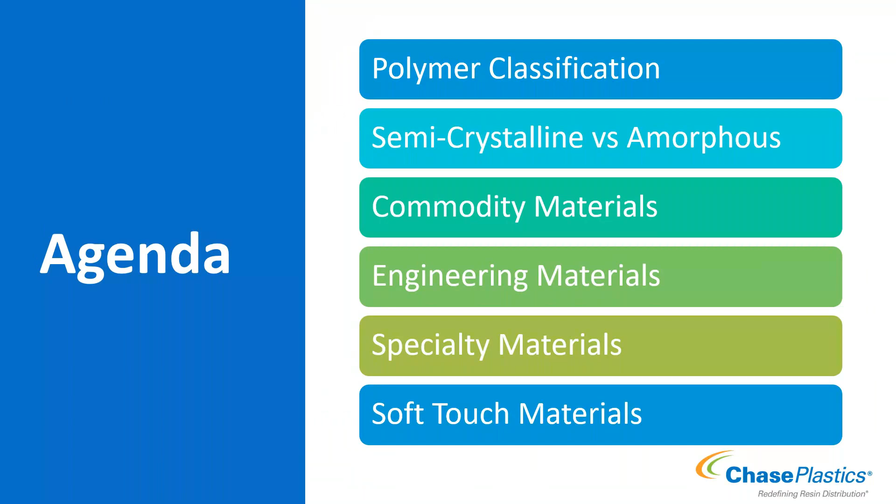Then we're going to go over different commodity materials, different engineering materials, different specialty materials, and then lastly, some soft touch materials. Okay, so again, if you were part of or watched the first part on basics, you'll recognize this pyramid here to go over the different materials.

So the different classifications, and how I also then broke up this presentation a little bit. You're going to have your commodity grades at the bottom of your pyramid. They're lower cost typically. You're going to see a little bit lower performance. Generally, thermally is the big one there. And then you're going to see that you typically buy them in really large quantities. So typically when you think plastics, these are going to be the materials that first come to mind, unless you're someone that does in fact just mold a bunch of specialty products. So we'll cover a few of those under the commodity section.

Then you have your engineering. So now you're going to go up in cost a little bit. You're going to go up in your performance a little bit. And generally you buy them in moderate quantities. There are some applications, of course, where you might buy a ton of the material, or you might only buy a little bit. But you're starting to see an improvement in some of your performance features here. So a little bit better heat performance. And then they might also have a special or unique value proposition within that material.

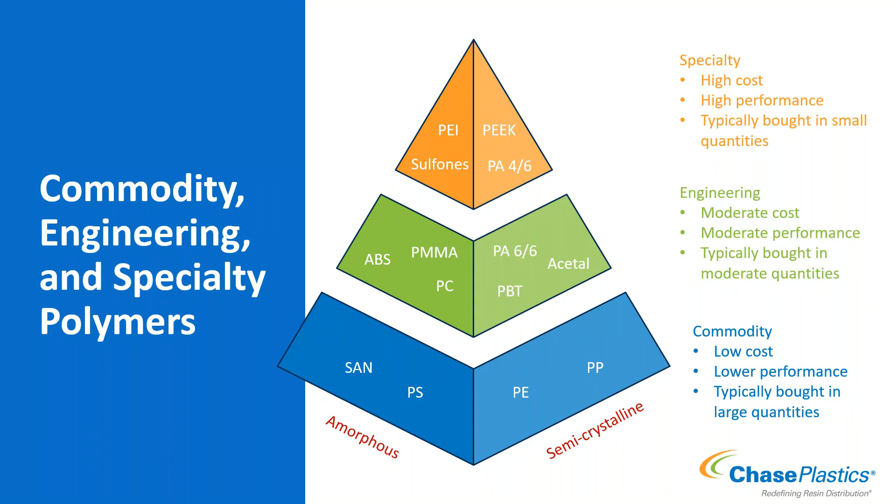And then specialty at last is going to be your higher cost materials. They have a special attribute or attributes that make them unique in how they perform. And so there's a couple of them we're going to go over today and talk about specifically. Higher performance, specifically in heat performance, and then again, also a unique value proposition that makes them apt for whatever they're being used in. And generally you buy them in smaller quantities. There's not always as high a demand in some of these specialty applications, so the material demand is also not as high.

Okay, so then again, if you were on the basics, you've seen this. We're going to do a semi-crystalline review quickly and an amorphous review quickly. Again, because I talk about the morphology of each material I cover, I want to make sure that we're understanding what that means about the material before we get too far into it.

So semi-crystalline materials have a highly ordered structure. They have crystal regions, and they are semi-crystalline because they're not 100% crystalline. A general rule of thumb is 30 to 70-ish percent. So 30% of it might be crystalline versus 70%, depending on which material we're looking at. They are typically opaque. There are some exceptions where we have made some of our semi-crystalline materials clear, but they are typically opaque because the crystal regions do not allow the light through.

They have a sharp melting point. So your Tm is where you're going to run a little bit hotter than that, because your Tm is the thermal point at which those crystal structures will start to break apart. There's enough thermal energy that they'll break apart so we can process them. They tend to shrink more. And so you'll see across the board, as I cover the materials, I also include a broad shrinkage range. It's typically going to be a wider range and a larger value for shrinkage for your semi-crystalline materials compared to your amorphous.

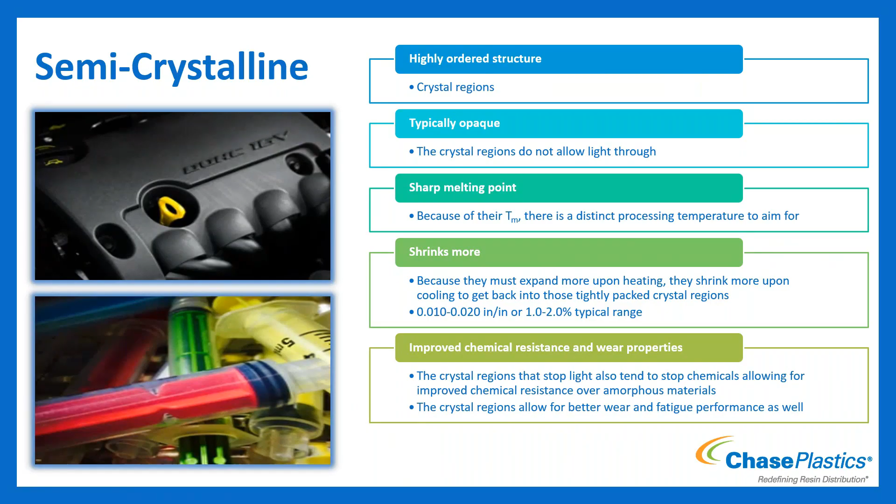Okay, and then they tend to have improved chemical resistance or wear performance. You'll see in some of the materials that I cover, that's going to be some of those value propositions, that they have good chemical resistance or good wear performance. You'll see that pretty commonly with our semi-crystalline materials.

Okay, and then amorphous, random structure. A means without, and morphous is structure. So without structure, it's got a random structure to it. They are typically transparent because they don't have those crystal regions to block the light from getting through. There are some exceptions to that, and we will talk about some of those when we get to the materials that I'm going to discuss today.

They have a gradual softening temperature. So because they don't have those crystal regions that require that temperature to break them apart, they separate and expand further out past your Tg. So they generally have a little bit of a wider processing window thermally than your semi-crystalline materials. They don't have to expand as much when they're being processed, so they therefore don't shrink as much either. And so a smaller range, generally in the 3 to 7 thou for your shrinkage there.

Again, I have the shrinkage values for materials we'll cover. With that, it does allow for better dimensional stability and tighter tolerance control out of your amorphous materials. So you'll see in a couple of the materials we talk about that will be brought up as a value proposition for it. And then also because it has less likelihood to shrink or shrink non-uniformly, you're less likely to experience warp out of your amorphous materials as well.

Okay. All right, so that is covering our general overview and reviewing what we had. Before I get into each of the individual materials under those sections, a couple things I want to point out. One is going to be the generic values that are provided here are just that. They're generic and generally a really good range or point to start with in terms of the performance of the material. I would always advise, if you know you're going to use a very specific grade of this material, use that data sheet, use that value, use that information provided by the manufacturer. So again, keep that in mind.

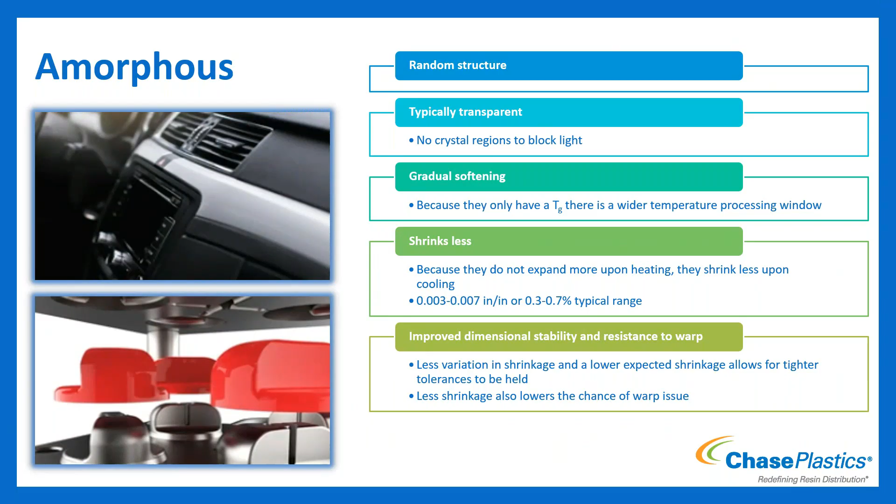Okay. All right, so we're going to start with commodities. I cover a few of the commodities. I'm not covering all of them that are on the pyramid. So if there's a certain commodity you have questions about or would like to know about, same with the engineering materials and the specialty materials. I could talk for hours on end, and I'm not trying to take up all of your time doing that. So if there's any material really that's not covered and you want to talk about it, feel free, get with me and we can talk about it. But the ones that I do cover, we're going to start with polypropylene.

So morphology, it is a semi-crystalline material. So we covered that, means you're going to have a little bit more shrinkage. So the shrink for your polypropylene is in the 1.7 to 2.2 range, or 17 to 22 thou range. Your specific gravity, generally unfilled, is going to be about 0.9 to 0.91. Because it is lower than 1, which we compare it to water, these materials will float. So if you've ever worked with a polypropylene part or pellets, if they're unfilled, pellets will float or parts made of it will float.

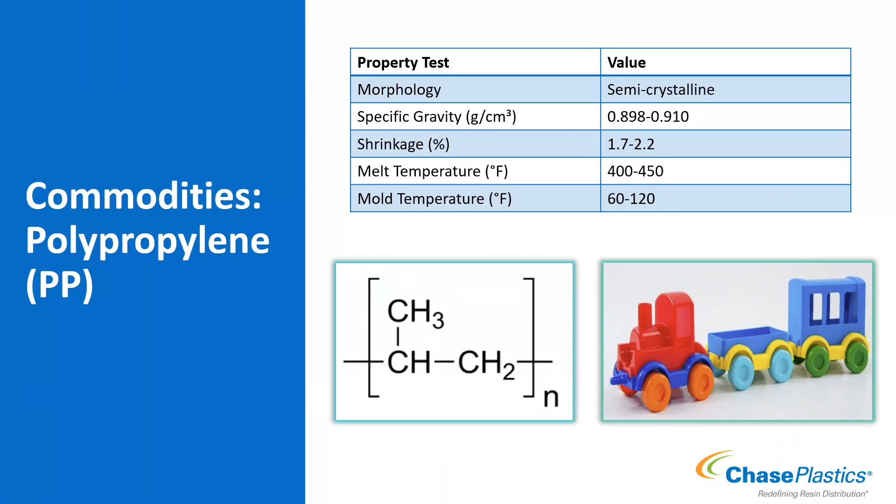Okay, so some information about polypropylene. Impact values. So when we're talking polypropylene, you're going to have a lot of different variants of it that are going to vary in impact performance. And so what we do is we can take polypropylene and we can copolymerize it with ethylene monomer, and we can get propylene copolymers.

Depending on how much we use and how we do it, we can affect the impact of the material. So propylene as a homopolymer can start with an impact as low as under 1 foot-pound per inch notched Izod and get all the way up to no break or plus 10. So we can really vary its performance and impact depending on how much ethylene is in the material and how that's processed. So you can start your homopolymers with low impact, and then the common ones are going to be a 2 Izod. Though there is a range, you can get a 1.5, you can get a 3.5.

2 Izod is a very common impact for a copolymer, and then your no breaks, again, which are generally anywhere from an 8 to a 10. It kind of depends on the supplier and what they will denote as a no break, but really high impact out of your copolymers there.

You can also make polypropylene transparent. So random copolymers can also be transparent. I do note though that there is a little bit of haze with your propylene. So depending on the thickness and how it's processed and a few other things, you can affect the haze or cloudiness of it, but you can make a clear propylene. Propylene being semi-crystalline, the clear versions are those that don't follow the rule, that have to be opaque.

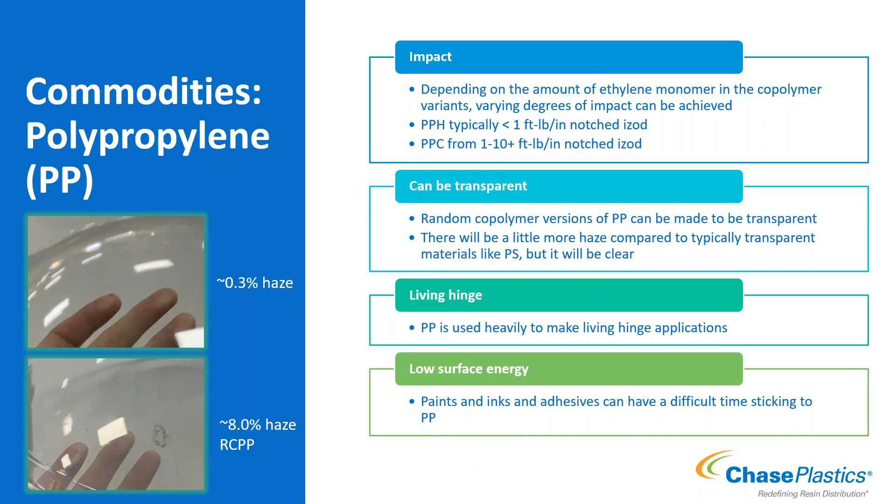So some applications for propylene, stuff like bottles. So shampoo bottles could be made out of propylene. The syringe bodies that are clear typically are made out of a clarified propylene. Dog bowls, different trim inside of automotive interiors, a lot of different applications in propylene and across varying types as well.

All right, so propylene, now we'll talk about ethylene. So you'll notice the chemistry on that. It does not have the additional CH3 off the backbone. And so kind of similar in chemistry, just doesn't have that pendant group CH3 hanging off. And so polyethylene morphology is also semicrystalline, just like your propylene is. A specific gravity range of 0.915 to 0.965. You'll see when we talk about the different densities, high density, low, linear low on the next slide. That is the reason for your large range in specific gravities.

Being semicrystalline, it does also shrink quite a bit. So you're in the 1.5 to 2.5 range. Your temperatures, it's still in that 400-ish range, and your mold temperatures in your 70s to 150s.

Okay, so some additional information on it. So polyethylenes come in a variety of densities. So you might hear or use high density polyethylene, low density polyethylene, or linear low density polyethylene. That is 100% attributed to if the material is branched or not. So for your high density polyethylenes, there is no branching that occurs. And so that additional monomer is not growing basically off the side and branching out.

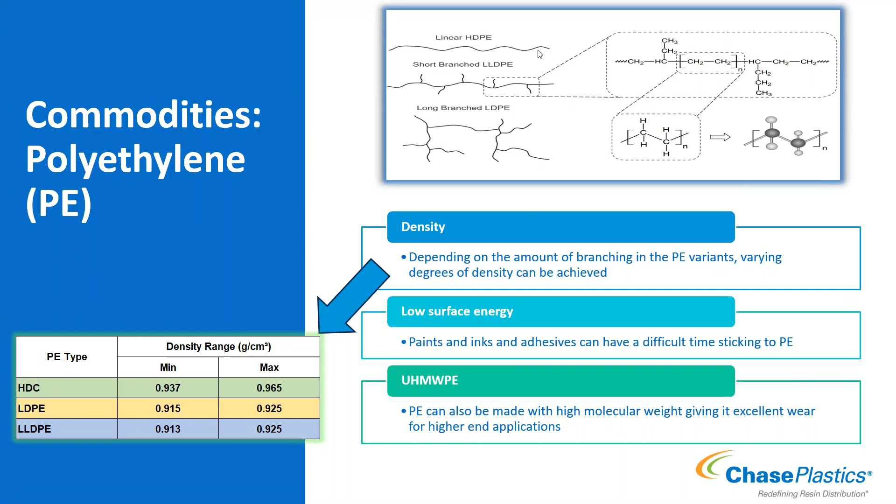So some of those applications, the ultra high molecular weight polyethylene with that great wear performance and durability is used for iceless rink tiles. So if you've ever gone ice skating, quote unquote ice skating, where they utilize plastic tiles instead of actual ice, that is ultra high molecular weight polyethylene.

And then some other applications for more standard polyethylene grades would be stuff like your recycling bins, your milk cartons are made out of high density, some of your chemical containers or gas containers even will be made out of polyethylene. So common material there as well within a lot of different applications.

Okay. And then our last commodity that we're going to talk about today is polystyrene. Again, there are other commodities, of course. If you have questions about them, feel free to ask, but these will be the three we're going to cover.

So now if you look at the chemistry, similar to your ethylene and propylene, but instead of the CH3 that the propylene monomer has, it has a benzene ring off the backbone. That benzene ring gets in the way when it has a random structure in terms of how it alternates on the backbone. And so polystyrene in general is amorphous. We'll talk about a variant of it on the next slide, but standard polystyrene is an amorphous resin.

It is very clear. It has a specific gravity of 1.04. So now we're above 1. So these are no longer materials that will float when they are put into water. They are now higher specific gravity materials. If you were to take any of those knives, forks, what have you, and put them in the water, they're going to sink.

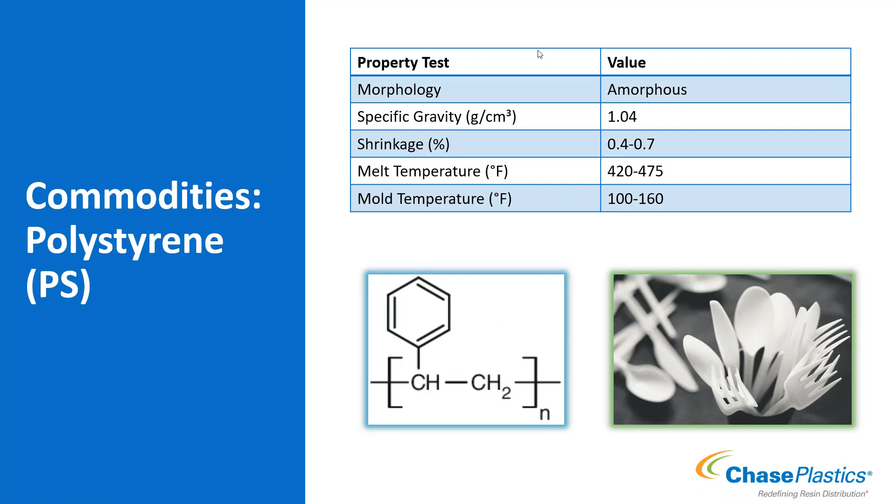So some additional information on polystyrene. Polystyrene has excellent clarity. It is also a very brittle product. Polystyrene is also known as general purpose polystyrene. So if you see GPPS, or sometimes people will use the term crystal styrene, they are all referring to standard polystyrene material. Okay, so it's very brittle, but very clear.

But what we can do then is we can add stuff to it to improve that brittleness or that impact performance. So high impact polystyrene, HIPS, we will take a rubber or impact modifier and we add it to the polystyrene. It improves its impact. Because of the rubber though, it does affect the clarity. So standard GPPS is clear, very good clarity. As soon as you add something to it, like the rubber for HIPS, no longer a clear product. So you do lose that.

And then a couple specialty versions of polystyrene. Polystyrene can be made to alternate the benzene ring in what they call a syndiotactic pattern. So it alternates back and forth which way it is. So if you follow the arrow, it shows alternating on each side.

So if you've heard of SPS, or syndiotactic polystyrene, those alternating benzene rings allow the chains to get close to one another because they're in such a pattern that now they can kind of get close to one another. And so syndiotactic polystyrene actually will crystallize and is a crystalline version of standard polystyrene. And so it gives a little bit better heat performance, a couple other performance boosts there as well. But heat performance is a big one, and it's used a lot more in more electrical type applications.

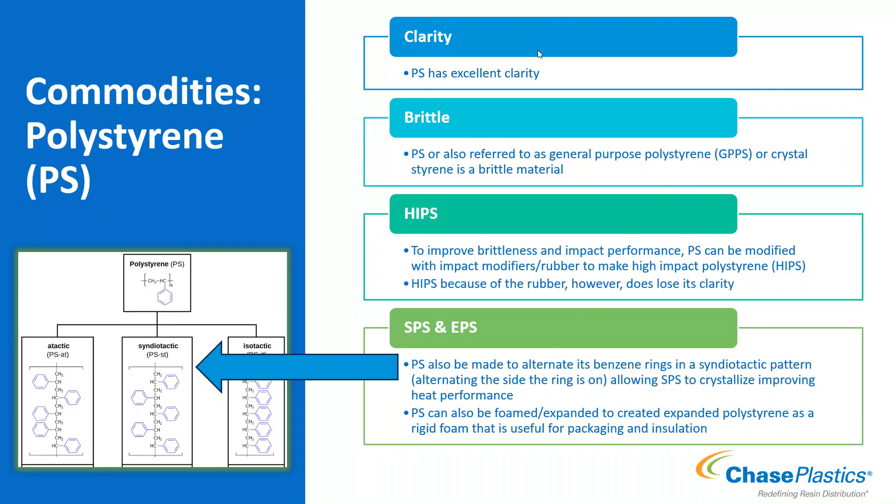Okay, if we recall, the younger generation, I'm sure they don't have CD cases, but CD cases, you think of them, they drop, you step on them, they break, they're brittle. Polystyrene material was typically used for those. Your cutlery that's really fairly easy to break. You go to eat something, use the fork into whatever you're trying to eat, you push a little too hard and it snaps a little piece of the tine off. It's probably a polystyrene piece of cutlery.

And then your foamed materials. So egg cartons are made with EPS, and some of your insulation or some of the packaging for holding things in place when it ships, stuff like that, also EPS. So different variants of polystyrene and different versions of using it.

Okay. All right, then we have some of our engineering products now. So we had our commodities, we did propylene, ethylene, and styrene. Now we're going to talk about some of our engineering products. So now we're moving up a little bit in performance. We're getting a little more complicated. As you can see, the chemistry is a little more complicated than the last three we've had, but a little bit of improvement in certain areas in terms of performance.

So ABS is acrylonitrile butadiene styrene. Across the chemistry, that's what you see here. In this section is your acrylonitrile, your butadiene, and your styrene. So you'll notice the styrene, if we remember our chemistry and that these little joints here represent a carbon, is actually the same monomer and chemistry of your standard polystyrene. So ABS is made up with styrene being one part of the polymer.

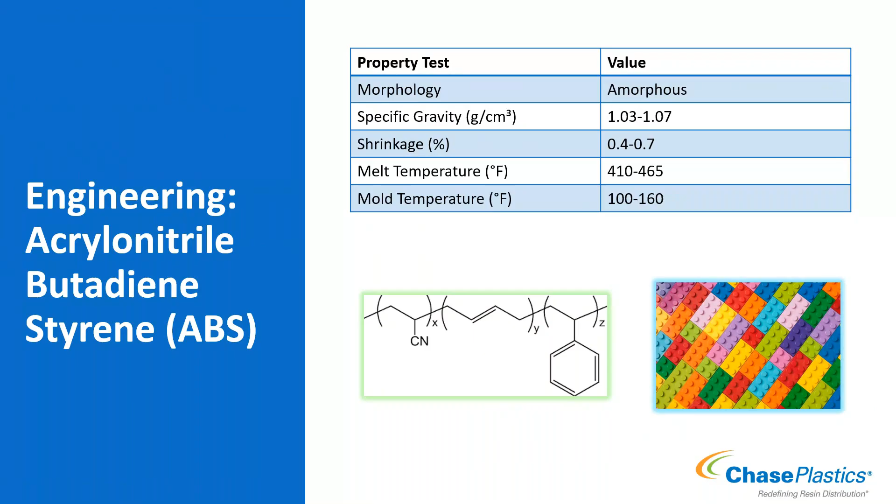Okay. All right, so as you'll notice, as we get into more complex, more engineered products, there's likely to be a little more information on them because there's a little bit more to know about them. So ABS is what we call a terpolymer, ter being three. So it's got three components, A, B, S. And so as a terpolymer, the A, acrylonitrile, helps with its heat performance. There are some other smaller things it also will help with, but the overall driving change when you increase the acrylonitrile amount is going to be the heat performance. Your butadiene, which is a rubber, is good for impact. The styrene portion helps with the processability of the material.

So what we can do is change the ratio of how much of each of those components is in the ABS grade, and that's what allows us to get varying performance out of ABS. So if you look at some data sheets on a standard general purpose ABS, maybe you're looking at an impact value of 4, 5, 6 foot-pounds per inch Izod. Then you have grades that are considered high impact grades that get you into the 8 or 9 foot-pounds per inch notched Izod performance. And then you have grades that are standard ABS, and then you have high heat ABS grades.

So again, I can change out the ratio of how much of each is in it, and that's what gives me my varying performance. Okay. The butadiene rubber in the ABS is what accounts for ABS being an opaque resin. As we mentioned when we reviewed, a lot of amorphous materials tend to be transparent. ABS is not transparent because of the butadiene. It does not allow the light through.

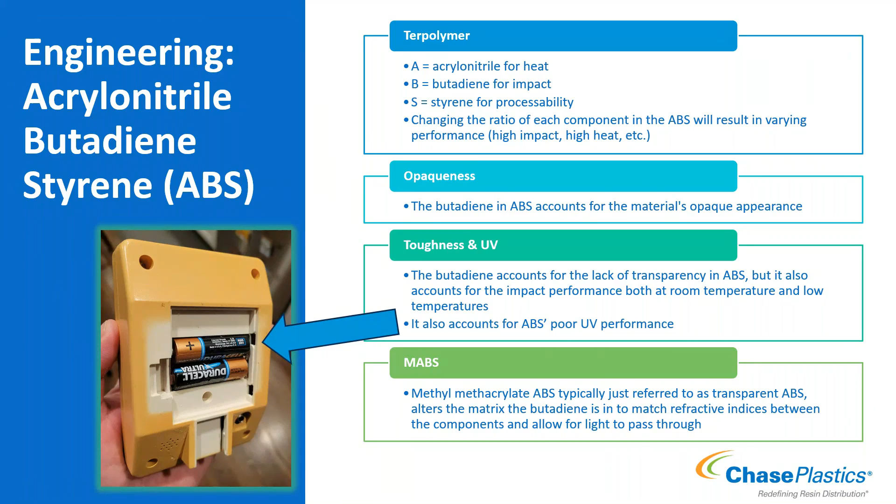So the matrix the butadiene is in changes its refractive index, and now the two match. And so it allows light through. So really complicated way to just say, we can make ABS transparent. We just alter the matrix the butadiene is in. So there are transparent grades of ABS.

Okay, so some applications, think housings, think things that have to have good dimensional stability. So maybe components on hospital beds, maybe housings on medical machines. The little window on your soap dispenser, a lot of times they use MABS for that, transparent ABS. Maybe the push handle itself is ABS, and then the lens itself is MABS, transparent ABS.

ABS is used a lot in pipes and fittings. And then it's also used a lot for automotive. If you've got little trim parts or decorative parts, specifically your really shiny parts, a lot of times they tend to be ABS, or other parts within a car can be made out of ABS. And then the big one that we always like to point out is Legos are made out of ABS. And so good dimensional stability, we need to be able to put the parts together, right?

Okay. All right, so ABS, now we're talking about polycarbonate. So moving on our list of engineering products. So polycarbonate is also an amorphous material, but it is clear. So amorphous grade that is clear. You'll see the specific gravity of this material jumps quite a bit. So we had been in the 1 to less than 1 range. Polycarbonate jumps up to 1.2. Shrinkage is still in that low range, so 0.5 to 0.7 for polycarbonate, amorphous material again.

Now our temperatures are starting to creep up. We're in the 500 to almost 600 degrees, so a little bit hotter of a material. And then mold temperatures in the 150 to 250. Again, a wide range because I'm trying to cover generically where some of the other polycarbonates may fall. And what I want to point out is our 2 benzene rings here in this chemistry with your CH3 groups. This is the remnants of bisphenol A. So we will talk about it in the next slide, but if you can, keep in mind what this looks like.

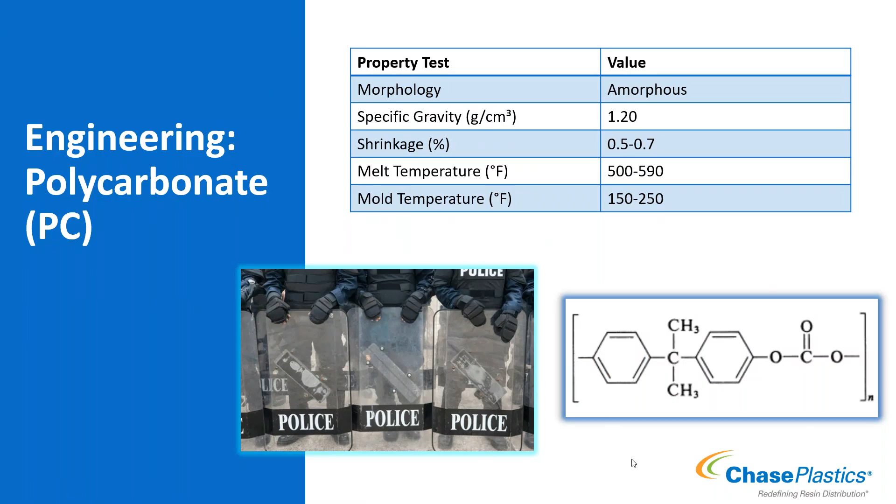There is another material that contains it as well that will be pointed out when we get to it. Okay, so again, as we're getting a little more specialized, there's a few extra words on these materials because they do a few different extra special things. And so I want to point them out.

So polycarbonate, excellent toughness, great impact performance when we talk about unmodified materials. So 10 plus foot-pounds per inch IZOD out of a standard polycarbonate, as long as we're not getting too small of a radius or too thick of a part, which we'll talk about in a little bit, but excellent toughness out of polycarbonate. Polycarbonate can also be formulated to utilize a UV stabilizer and maintain clarity.

So a lot of times when you start adding stuff to clear materials, you start losing the clarity because you have something else that's competing with allowing the light through. So polycarbonate can be formulated with UV stabilizers and then maintain its clarity.

BPA should be talked about because it is a part of polycarbonate and we get asked about it. BPA is part of the chemistry. So we react phosgene and bisphenol A to make polycarbonate. So if you have an end user or you are an end user and you want to be able to market that the material has no BPA, you're not able to do that with polycarbonate. Polycarbonate is made with BPA.

It is there. The one thing though I do want to point out is that based on safe harbor levels, or levels that have been established by EPA or also the EFSA, which is the European safety standard, they have set a safe level at 0.05 milligrams per kilogram of body weight. Which means nothing if you don't know the exposure of the material that you're seeing.

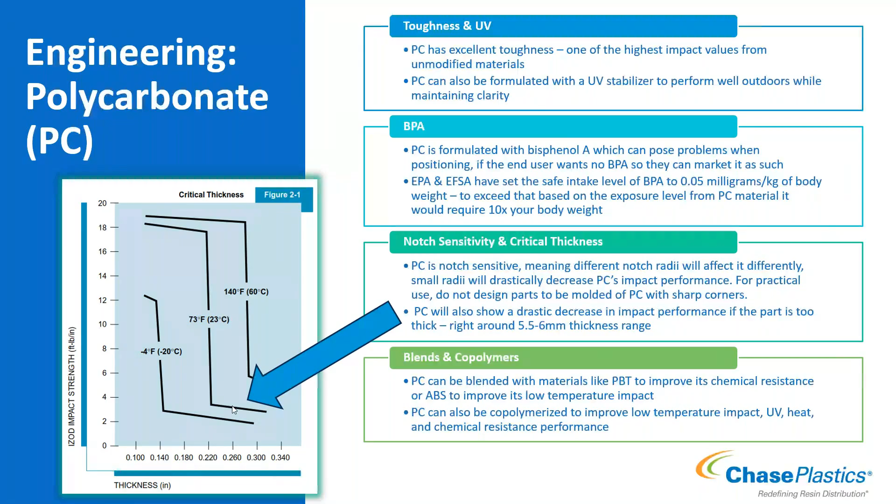Okay, and some applications for polycarbonate, again, great impact. So stuff like your automotive lenses, if you've got rocks that are coming up and hitting, the polycarbonate can withstand that impact. They tend to be coated generally to help with scratch resistance also. That's a little side note on that, but because of being able to withstand the impact of rocks or other things that might come up from the road, lenses are typically polycarbonate.

A lot of meter housings and stuff where we want to maybe not allow someone to crack it and break it open and get to whatever's behind it, but then still be able to see through it, maybe even protect it from UV if it's a UV stable grade and make sure that the UV light doesn't get through it to what's behind it.

Safety glasses are commonly made out of polycarbonate. And then those really large water jugs generally are also made out of polycarbonate. If you were to use a material that was a little more brittle and you dropped one of those things that are full with lots of water, very heavy, likely to crack and break, and we can't have that happening. So a lot of good options to utilize the really good performance in toughness that polycarbonate has.

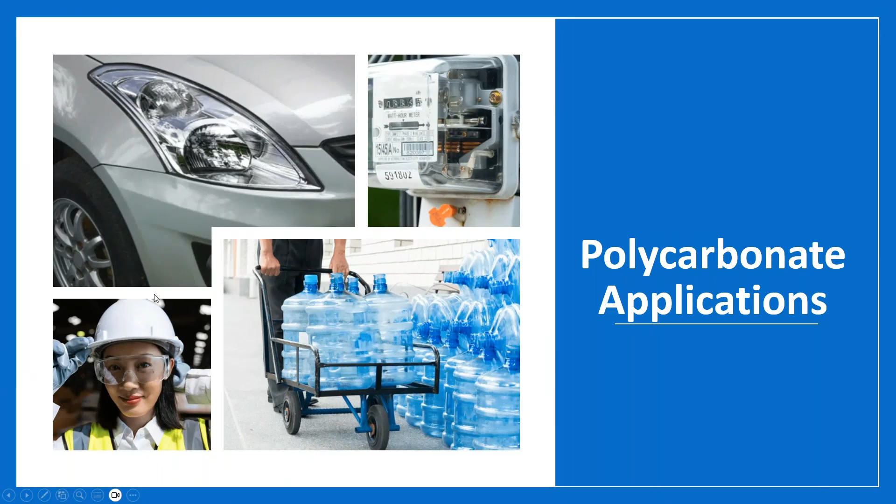Okay. All right. Now, nylon, as I mentioned again, there is a separate presentation just going over a bunch of different types of nylon. And so in this case, I kind of did more of a covering of the family of polyamide versus each individual material a bunch of times. So I gave a general performance review and then the ranges that kind of go across the majority of those nylons as well. So the morphology of nylon is going to be semi-crystalline.

You can make amorphous nylon. So they do have amorphous nylons that are clear, or microcrystalline nylons that are also then clear. So that goes against the standard semi-crystalline materials that are opaque. But our standard nylons that we'll be talking about, they're semi-crystalline.

Specific gravity ranges from 1.01 in your long chain grades up to 1.18 in your short chain grades, so more like a 4,6. And then your shrinkage also has a varying range because we're talking a bunch of different materials at once. So 0.6 to 2.2, depending on which nylon material type we're talking about.

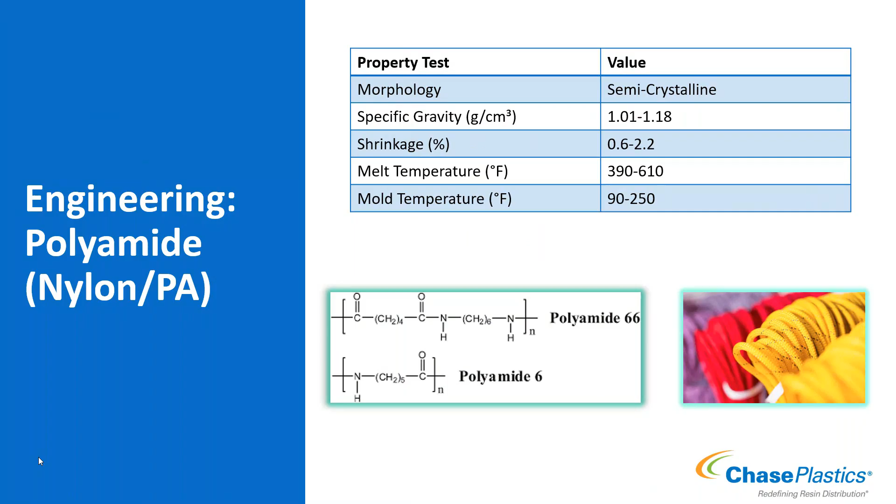All right, so some information about nylon in general. The standard nylons that we're talking about right now are considered linear. So there's no benzene rings, there's no aromatic content to it. They're just what we call standard linear grades. And so your 6, 6,12, 10, you name the number, as long as it's just a number, is going to be a linear nylon.

There are specialty grades of nylon that I am not covering in this presentation, but there are specialty nylon materials like PPA or PARA that are going to have aromatic content. So they're going to have benzene rings in their chemistry.

Those are specialized. Again, not talking about them here, but if you have questions about them, feel free to let us know. Your 4,6, 6, and 6,6 materials are going to be your standard nylons that are considered short chain nylons, or we just call them nylons. And then long chain polyamides, LCPA, if you've seen that acronym, that would refer to your nylons like your 10s, your 12s, your 9s even that are kind of odd. But those longer chain, higher number nylons, those are within the long chain polyamide portion of the family.

Okay. So nylon, though, in general, has great chemical resistance, specifically to automotive oils and greases. So great for automotive applications because it has really good chemical resistance to a lot of the chemicals it might come in contact with in an automotive application. Nylon also has really great wear performance.

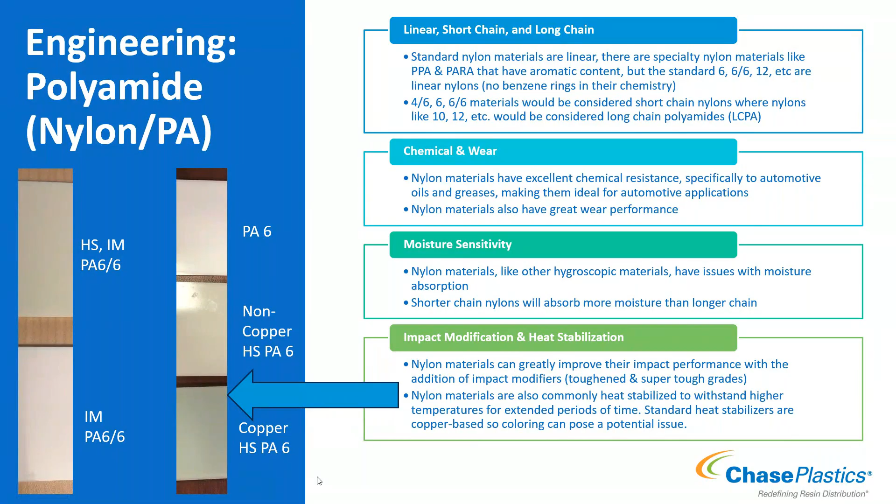Some applications, very wide range of applications because we have a broad range of nylons that we were talking about. Again, tried to shorten it down as best I could, but stuff like your under the hood applications, radiator end tanks, stuff like that under the hood are going to be nylon materials typically. Zip ties are generally going to be nylon based. Modular belting, so again, I mentioned resin on resin wear, much better with nylon than acetal. So a lot of plastic modular belting could be a nylon of some sort.

Okay. All right, and then I believe the last engineering product we're going to cover is polyesters, so PET and PBTs. And so we'll cover them kind of as a two-part family, if you will. Both of them tend to be semicrystalline, though there is an amorphous version of PET we'll talk about briefly, specific gravity between 1.3 to 1.4, depending on if it's a PET or PBT. Your shrinkage is between 1 and 2%, but they are semicrystalline, so you do see a larger value for shrinkage. And then your temperatures are in the 500-ish range, and your mold temperatures are in the 100 to 200-ish range.

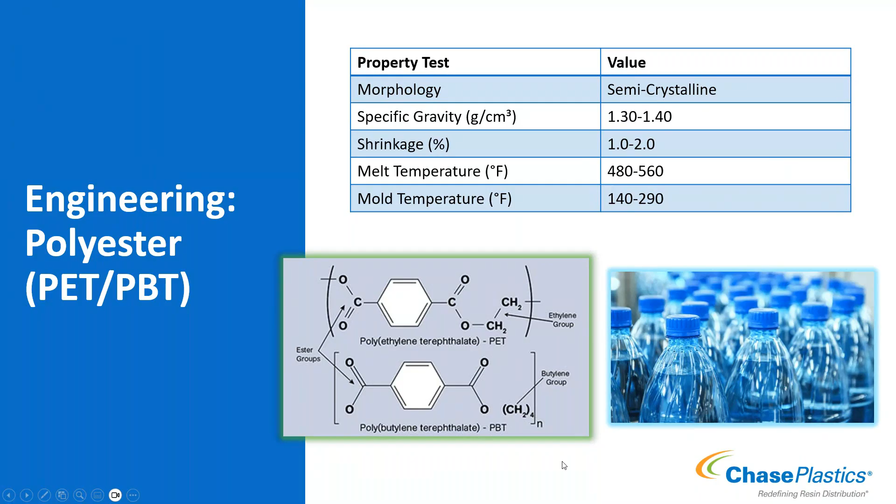Okay. But PBT, because of those additional CH2 groups, it's more mobile. It moves a little easier. It crystallizes easier and faster. Generally speaking, if you're going to do injection molding PET grades, they're generally either filled or have some nucleating agent or some type of filler to help aid in the crystallization, because it does not want to crystallize very quickly when you're using a PET.

Then you have amorphous PET grades. Sometimes they'll be referred to as bottle grade PETs. These are ones where, when we process it, we're going to freeze it quickly so it doesn't allow it to crystallize. So you effectively make an amorphous version of it, and that's what you're going to get out of your bottle type PET grades.

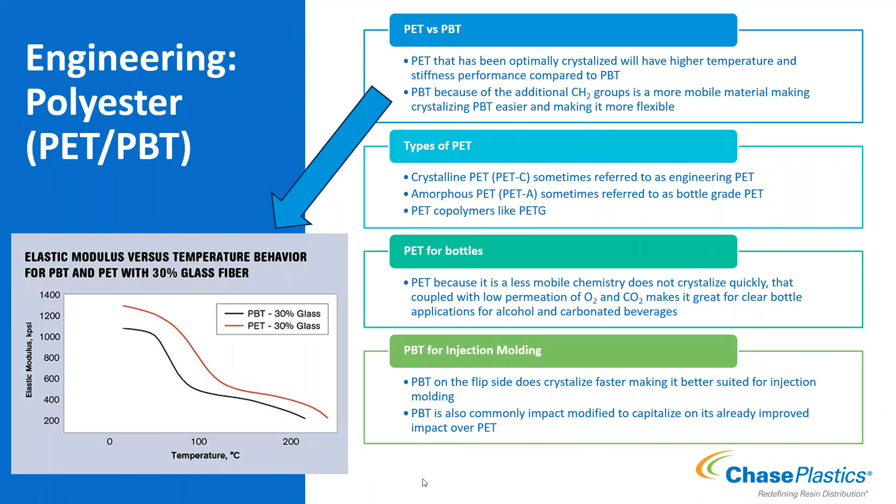Okay, so some common applications for these materials. Your keyboard housings are going to be PBT, your bottles PET, blister packaging for, you name it, medical, toys, whatever it may be. A lot of times we'll utilize PET. And then connectors, different electrical applications, are going to utilize PBT pretty commonly.

Okay. All right, so now we're going to get into the specialty products. You'll notice there's a lot of interesting value propositions about them. LCP I'm going to speak about briefly. This is the only slide I have on it because these aren't materials that you are necessarily running into in large quantities, or applications that require these types of materials. So I'll go over them, but the majority of the time we're not seeing these types of materials out there. But it is good to know about them and kind of know how they perform.

So LCP, liquid crystal polymer or liquid crystalline polymer, I've heard it both ways. Its morphology is neither semicrystalline nor amorphous. Semicrystalline materials, when they are processed and in the molten state, do not have any crystallinity left to them. They're all amorphous when molten. That's why when it shrinks and tries to get back to its crystal structure, that's when your crystallinity starts back up. LCP, on the other hand, has sections that remain crystalline even in the molten state. So it maintains its crystal structure in those areas, and it kind of has its own morphology. It doesn't really fall into one or the other.

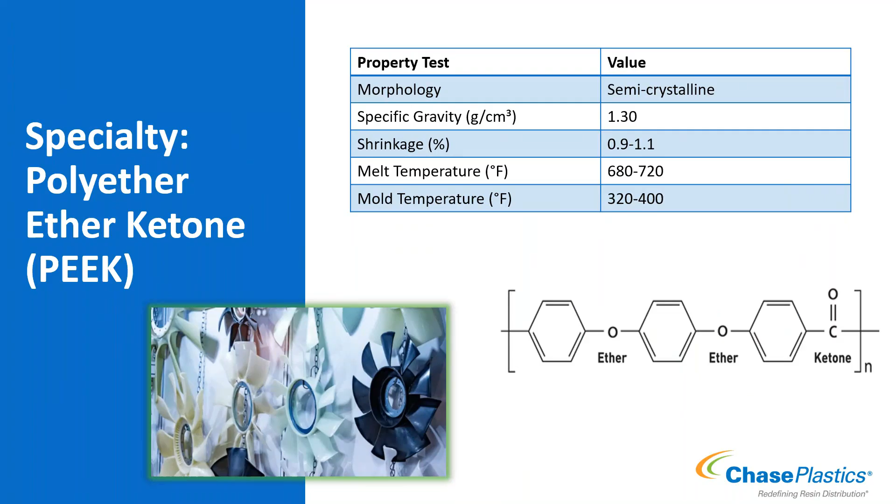Some performance features about PEEK and why you might use it. Excellent chemical resistance. Semicrystalline materials tend to have excellent chemical resistance, and PEEK is no exception. It has only one known solvent at room temperature, and that's highly concentrated sulfuric acid, meaning that only one chemical is going to dissolve down PEEK at room temperature. So all the other really aggressive chemicals do not dissolve down PEEK at room temperature.

PEEK maintains good chemical resistance to a lot of different chemicals up to almost 400 degrees F. So sometimes when you're thinking chemical resistance, you also have to think about environment exposure temp. If it's going to see those chemicals at a high temperature, it needs to, one, withstand the temperature and then also withstand being degraded by the chemical at that temperature. So PEEK can do that, really high temperature performance and good chemical resistance at high temperatures.

So wear performance also can be dictated by how much pressure you put on it when it's wearing on whatever it's wearing on and how fast you're trying to get it to move. The higher the value, the more it's withstanding that and is going to be okay to be run at high pressures and high velocities. So at the slower speeds, the 10 to 100 feet per minute range, you're in the 40K limiting PV. And when you get to 1,000 feet per minute, so you're really booking it, you're at over 20K still.

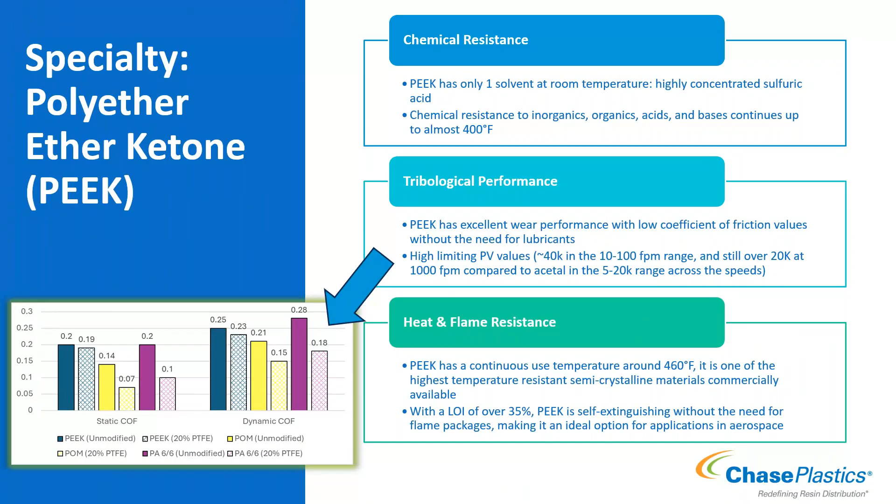Okay. And then our last specialty polymer we're going to talk about is PEI. You'll notice maybe some of the other specialty ones that I didn't talk about. I didn't necessarily go into PAI. I didn't talk about sulfones. Again, if you have questions, feel free to reach out. I'd be happy to help.

So PEI is an amorphous resin now. So unlike PEEK, that's semicrystalline, PEI is amorphous. It is also clear. It is amber in color, but it is clear. You can see through it. So that could be an advantage depending on what you're trying to do with your application.

Specific gravity of 1.27, low shrinkage. Again, it is an amorphous resin, so 0.5 to 0.7%, and still high temperatures as well. So melt temperatures in the 700 range, just like your PEEK. We're getting into high temperature performance. And then your mold temperatures around 300 degrees F.

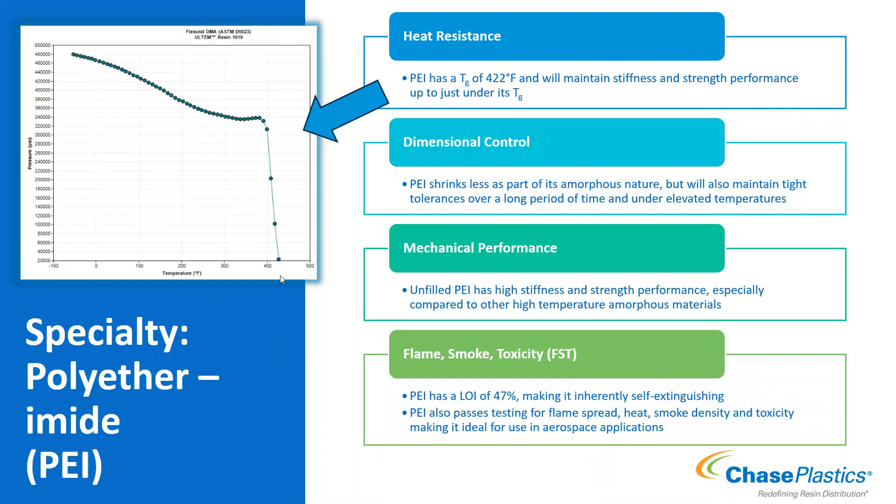And a lot of other applications also, but to give a few examples. Okay. And then lastly to cover, I've just got a couple slides to go over TPEs. Again, it's very brief. There is an entire presentation on it if you'd like to go see it, but it's just a real brief overview of the standard and common TPEs that we're going to see.

So TPE as a term, thermoplastic elastomers, can be used to denote a family of polymers that will have a hard and soft segment. Unlike standard elastomers though, thermoplastic elastomers can be processed on standard thermoplastic equipment. So I can injection mold it, I can extrude it just like I would another hard plastic. And so that's where this comes in. And then the different segments that are used, the hard and soft segments, that's going to dictate its performance.

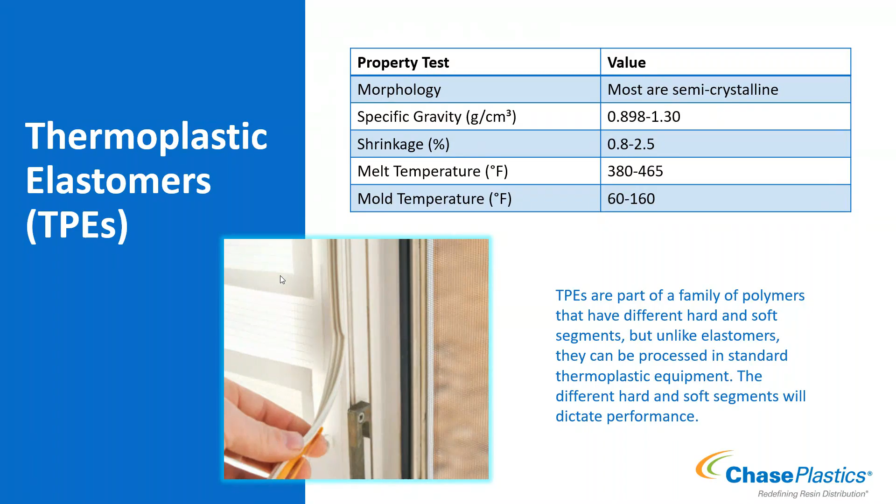Okay. So TPEs. So if I want a styrenic based TPE, or what some people just generally call a TPE, to not get confused with the family name TPE that all of these fall under, I call it a TPES or a styrenic based TPE. Whatever works for you, I just do it so it's a little bit easier to keep track of which type of TPE we're talking about.

Styrenic based TPEs are typically a styrenic based soft segment, so an SBS, SIS type soft segment, generally in a propylene hard segment. Really good wide range of hardnesses, so from double zero A's all the way up to 100A. Generally, then we start getting into the D range, but good low cost option. So if I'm going to overmold something and I just need a nice soft touch feel, TPE is a great option for that. Great colorability, great overmolding capabilities.

Because of the propylene hard segment, it wants to inherently overmold to propylene and ethylene, but you can make and formulate grades that are specially made to overmold onto other materials. ABSs, PCs, nylons, they can be made to do that as well. The service temperature of styrenic based TPEs will be limited to the propylene hard segment. So continuous use around 200-ish F, because again, you're limited by the propylene.

TPVs, that stands for thermoplastic vulcanizate. It goes through an intense mixing process, the vulcanization process. It forces the soft segments to cross-link. Because of that cross-linking, it acts a little more rubber-like. So you get a little bit better compression set performance, a little bit better tear strength performance than you would out of a standard styrenic-based TPE that's not been cross-linked.

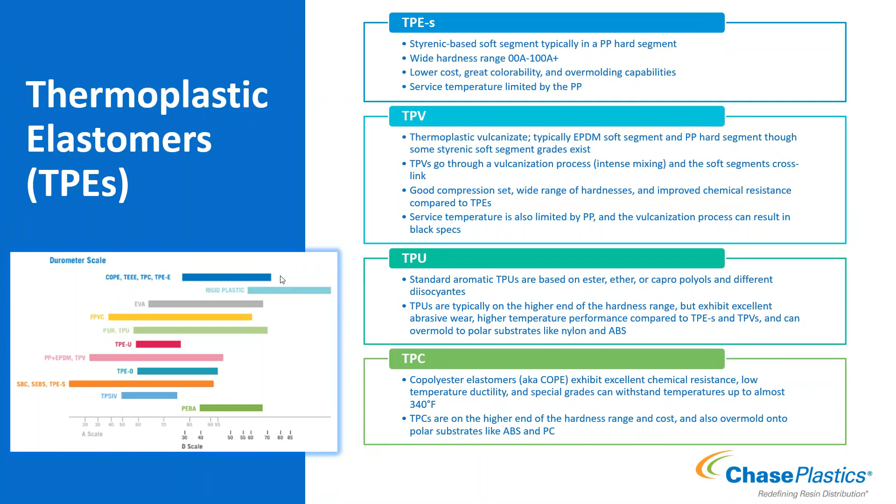TPCs are also on the higher end of the hardness range, so you're not going to get into those low hardnesses that you can get with the other materials. And then it also costs. You get the better temperature performance, a little bit better chemical resistance, low temperature ductility, and you're going to pay for it a little bit. And it also inherently likes to overmold onto polar substrates like ABS and polycarbonate materials.

Okay. And so some general applications for TPEs overall: caster wheels, hydraulic hoses, butt stocks on guns where it's the nice soft padding, and any type of overmold for a nice feel on a screwdriver or on your drill for an ergonomic handle that you can tell is more of a rubbery thermoplastic elastomer type product. That's where your TPEs are going to fit.

Okay. And with that, I apologize, I went longer than I normally do, but there was a lot to cover. So that is what I have for you guys today.